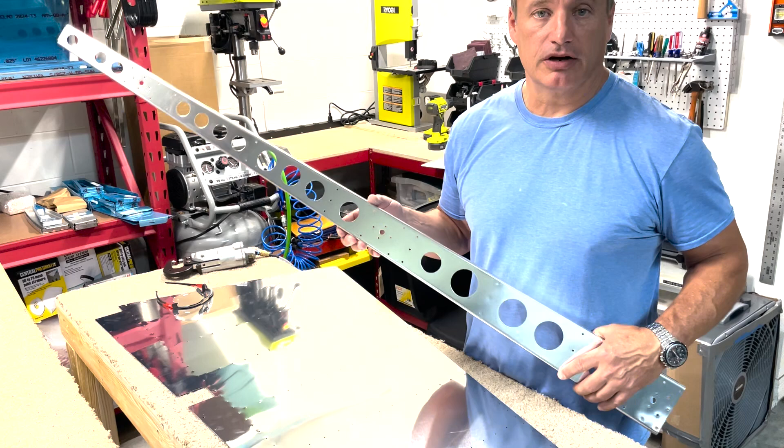So I grabbed a drill bit on the back end just to test the size. Turns out it's all been final drilled. I knew a lot of the RV10 and RV14 kits were now coming with holes final sized, which was what surprised me a little when I did the vertical stabilizer and those weren't. But I just got off the phone with them and confirmed it. He said yeah, most of the kit should be final sized.

So in the instructions it still says to go ahead and final drill the holes after you've Clecoed them together, then take them apart, deburr, and all that. But the good news is, at least so far for the rudder, and I'll verify other parts as I progress, it looks like this section doesn't have a lot of holes that need to be drilled out. I checked everything with a drill bit, then went ahead and put an actual rivet in the hole just to triple check that all the holes are final size, and it seems like most of them are. So that's good news, it'll save me a little time.

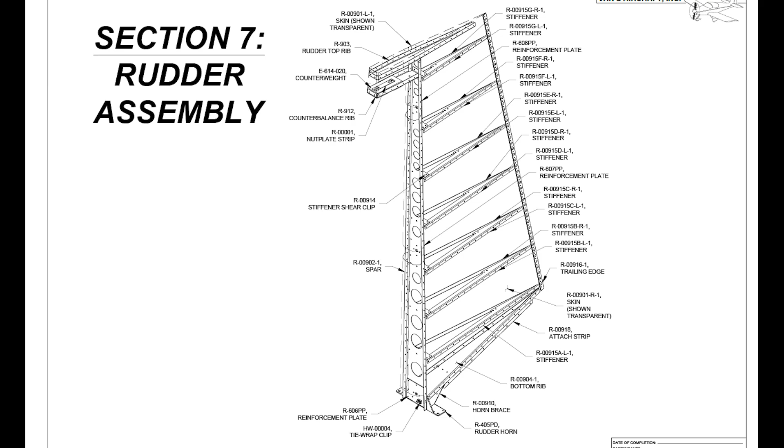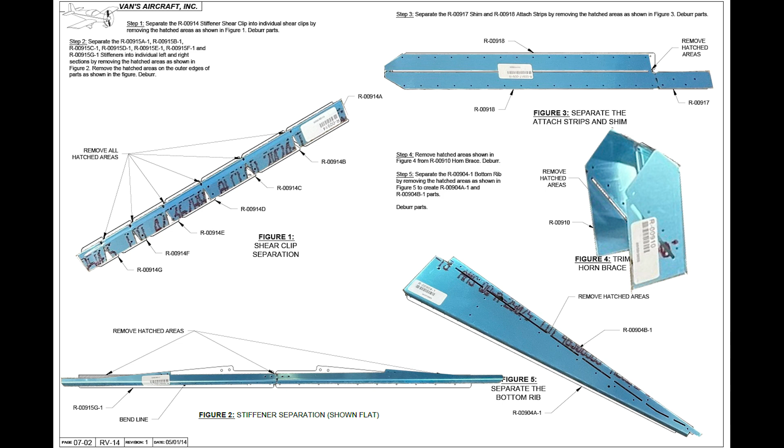So in order to make a completed rudder emerge from this set of plans, the first step, as is often the case, involves cutting or separating large pieces of aluminum into smaller pieces. Most of the aluminum parts for the kit are stamped out by a press at Vans, and when making a lot of small pieces, it's often more efficient to stamp them out as a single piece which needs to be trimmed or separated by the builder. So I begin by separating the single piece into what will become 7 shear clips, which will be used to join the left and right stiffeners to create internal ribs for the rudder.

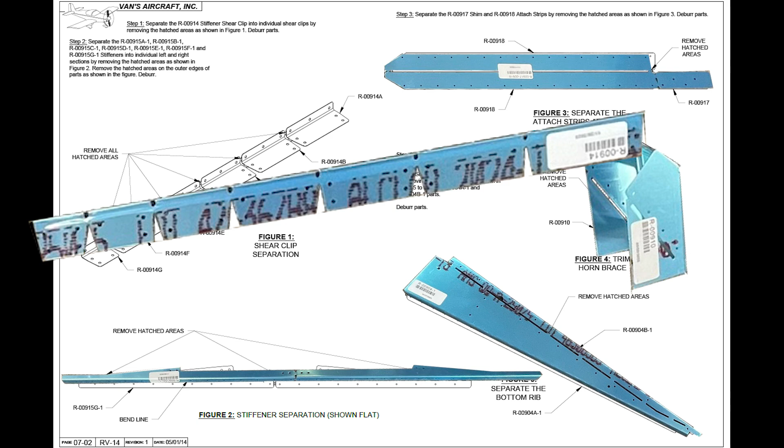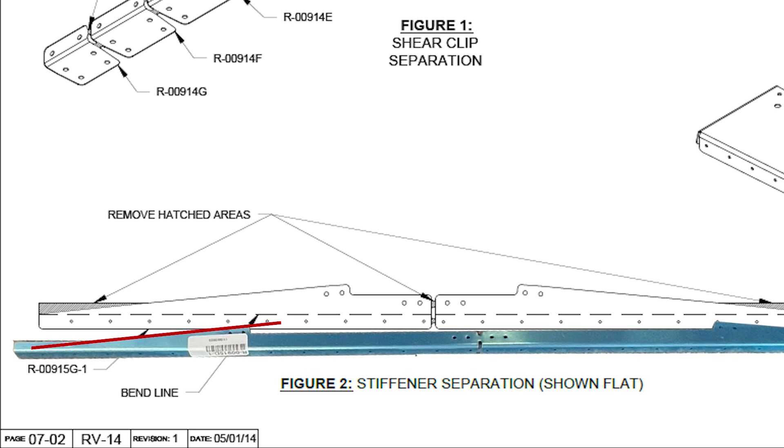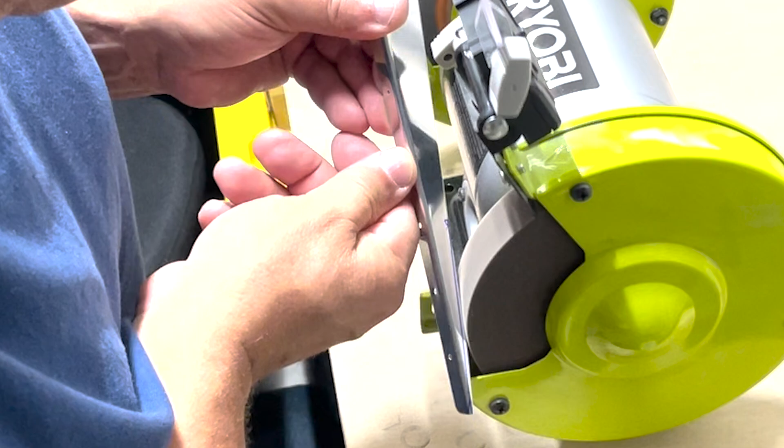Similarly, the stiffeners have to be separated and then trimmed and shaped. As you can see here, part of each stiffener was stamped out with part of the correct angle, but the ends need to be cut to extend the angle all the way to the end. With all these pieces, I start by making a rough cut with a bandsaw just a little away from the line, then use a Scotch-Brite wheel to carefully grind the excess away and bring it right up to the line. Then, of course, I spend a great deal of time deburring all the edges of each piece. The end result looks something like this.

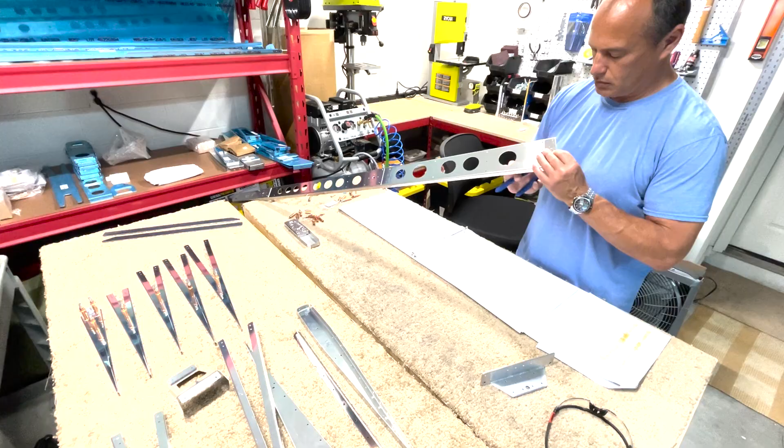The next step involves a lot of prep work, and then Clecoing together all the primary components that attach the rudder to the spar. This includes the large half of the bottom rib, the reinforcement plates, and the rudder horn. They'll all get match drilled where needed, and the top ribs have their corners shaped for the initial test fit assembly with the skins.

As you can see here, the top of the rudder has some ribs which extend out above the vertical stabilizer. Just below this extension in the top rib is a counterbalance rib, which, as the name suggests, holds a lead weight to help stabilize the rudder and prevent any fluttering during flight. The weight itself gets drilled out for screws, and the rib is countersunk and prepped for nut plates, which will hold the counterweight in place later on.

So as I mentioned, everything's been final drilled for the most part, but it's always good to double check, because I just found out this piece here—the holes in the spar are final drilled, but the holes in this rib right here are not. It was a little tough getting those in there. So most of the stuff seems like it is and should be final drilled, but occasionally you're still going to come across a part that's not.

The other thing you're going to have to do per the instructions—there's a couple spots where you're going to enlarge some holes but not others. So for example, in the rudder skins, all the holes are all final sized, but the instructions specifically call out for 2 holes near the top to actually get upsized. So you can't just completely ignore everywhere it says final drill—still have to double check as I go along. But a lot of the work has been done, which also means most of these holes, because they're final sized, don't need to be deburred either. I'll double check them all, but for the most part they all feel pretty smooth, so it saves a little bit of work.

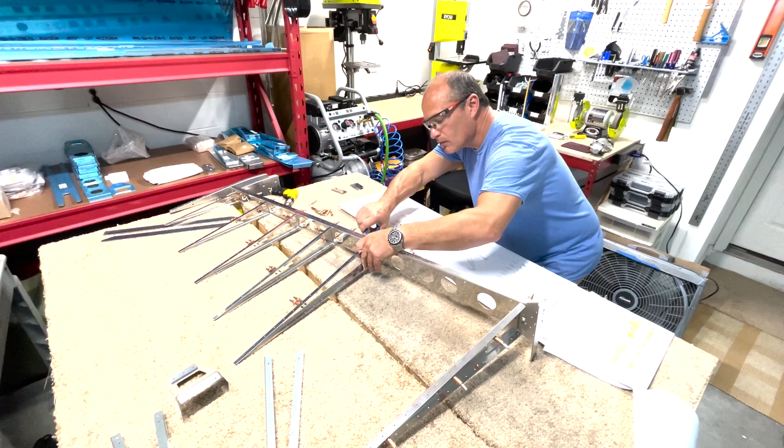The stiffeners are joined together as respective left and right halves, and then attached to the spar with the shear clips. This basically creates a 3-part rib-like assembly, which forms most of the structural skeleton inside the rudder.

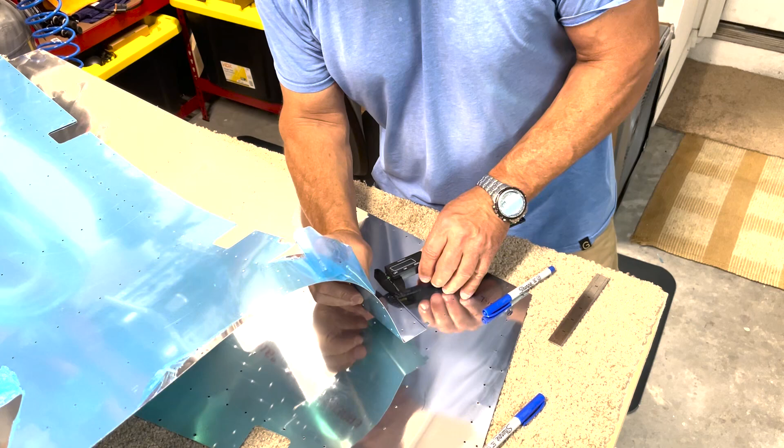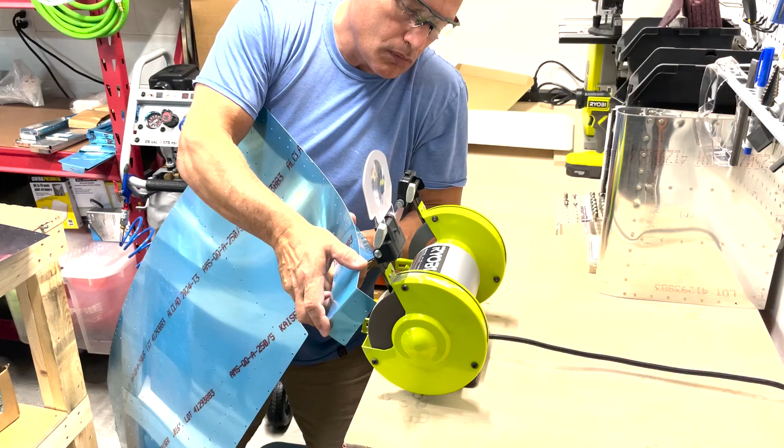Where the rudder skins overlap at the front of the top and the counterbalance ribs, the instructions call for a very small amount of skin to be trimmed away—only about 3/32 of an inch. I decided to use shears to make the cut on these edges, and I'm glad I did. It would have been very hard to maneuver the skins on the bandsaw, and the shears make a smoother cut. Unfortunately, as you can see here, I stood right in front of the camera as I made the cut. And again, I made the cut just a little bit outside of the line, and then used the 3M wheel to grind down the excess.

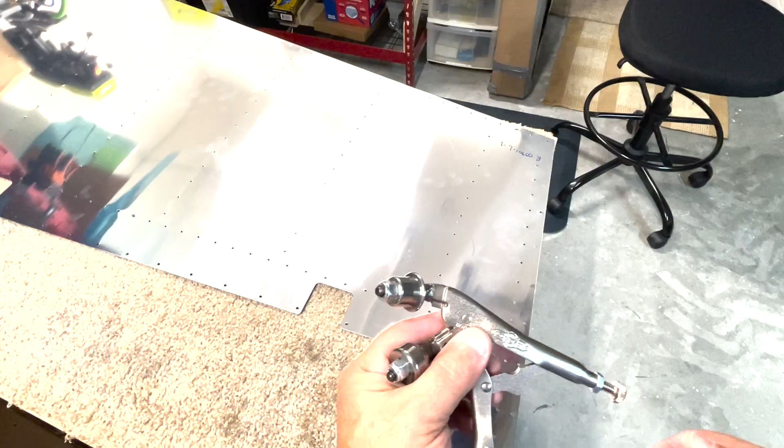Once that's complete and the edges are deburred, the edge of the top skin, where the 2 overlap, gets a slight bend rolled into it to keep the edge flush once it's all riveted together. So to set it up, basically you open this up so that when it closes, it's got a gap. Put it down here—let the edge of the metal not get up in this bend, but just in this flat part. Close it, and then holding it there, you just tighten the screw up till the two parts just touch together with a little bit of light pressure.

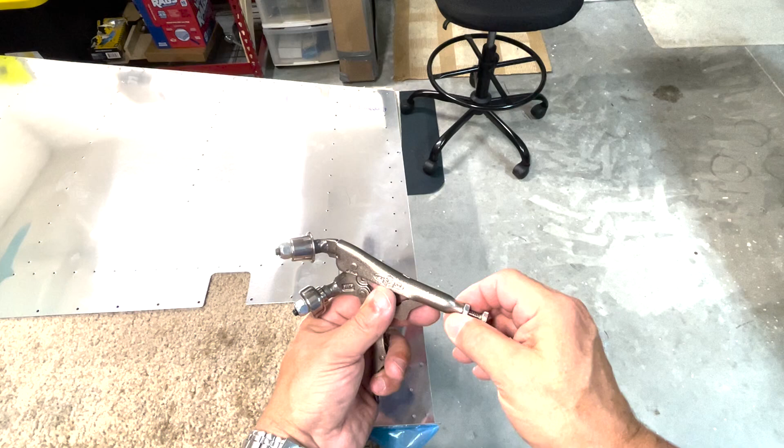Open it, turn this about maybe an eighth or a quarter of a turn, and lock it down, and that should give you that little bit of extra tension. Then when you put it in the metal, you're going to have the metal edge all the way up to this edge, which is going to allow you to get that little bit of a bend from this wheel as you pull it along one way, then put it on and push back to finish off the other edge. You don't want to start right at the corner—start near a corner, but leave a little bit of space. Pull it all the way one way, then push it off the other edge.

So in this next step, I'm mounting the trailing edge piece for the rudder to the back of the rudder skin. You line it up with the clecos, and then trim off the edge of it here to make it fit.

And then the next step is to go ahead and match drill all the holes for this. What they tell you is you want to be perpendicular to the chord line that runs through that angled piece. So with it sitting on the table, you'd actually have your drill on a bit of an angle, but I've got the whole thing sitting up on wood, creating the opposite angle here, so I'll be going almost perpendicular to the surface, which is basically what you want - perpendicular to the chord line that would bisect that.

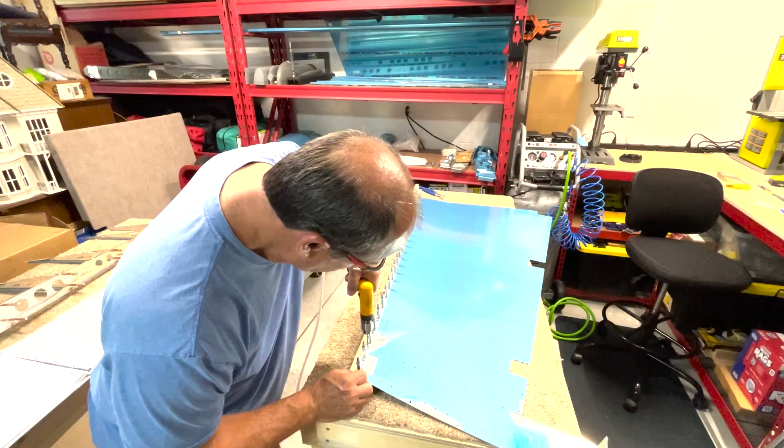The bottom assembly, made up of the bottom half ribs, attached ribs, and the rudder horn, is also assembled at this point, clecoed together, and then drilled as needed.

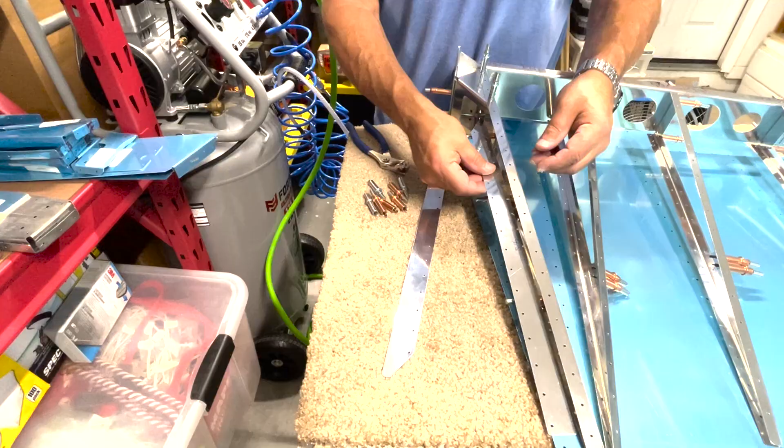Each half of the rudder skin now gets clecoed to the ribs and the spar and the trailing edge wedge for any required final drilling.

At this point, the whole thing gets pulled back apart, and all the edges and any holes that needed to be drilled will get deburred so that everything is ready to go to priming.

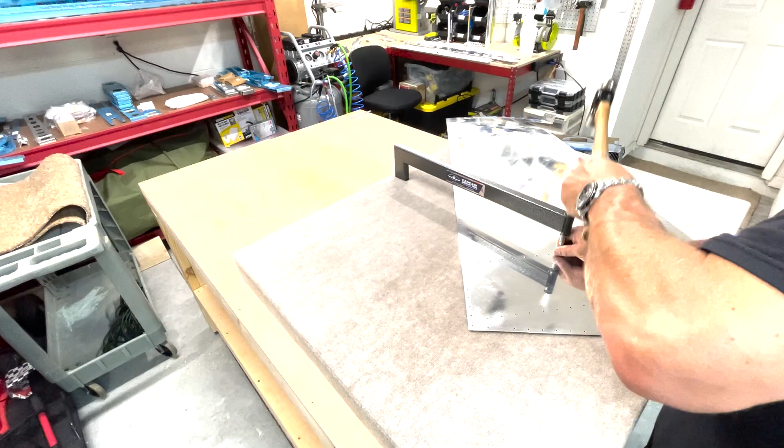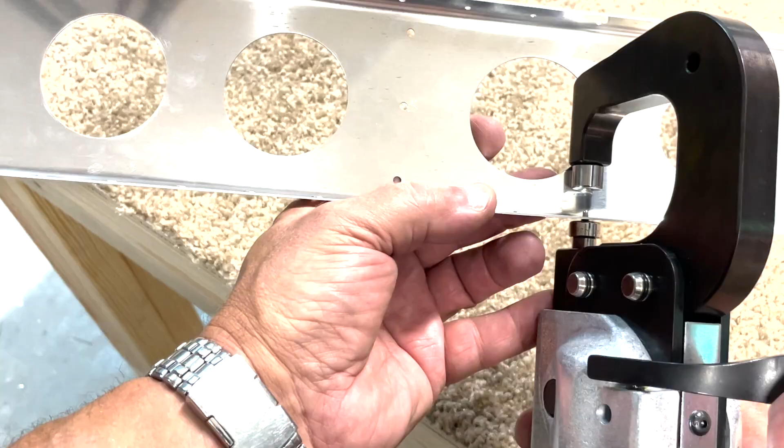And now the C-frame comes out to dimple the skins for the number 3 flush head rivets. Similarly, the spar, ribs, stiffeners, everything else gets dimpled as well. As is often the case, there are a number of holes which are not supposed to be dimpled or riveted, so those I'll cover up with some painter's tape to make sure I don't screw that up along the way.

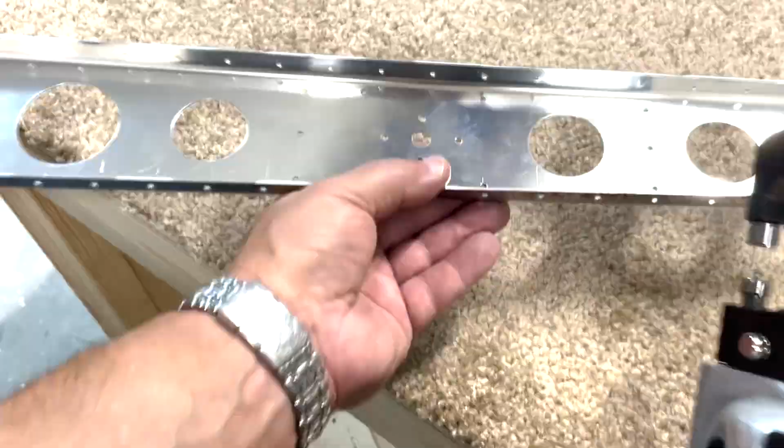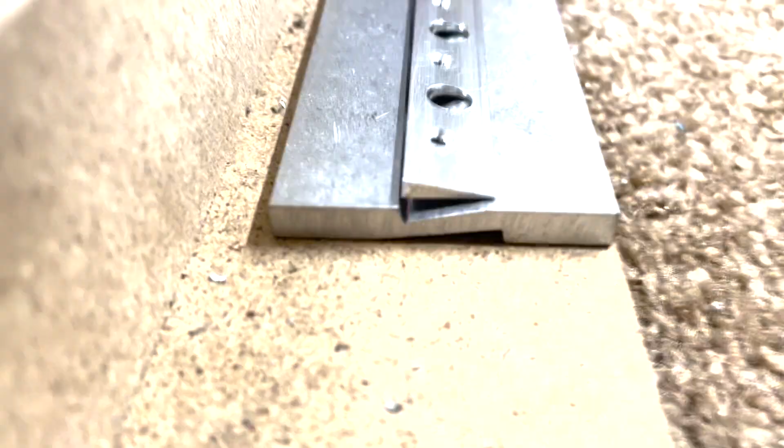This trailing edge wedge needs to be countersunk to accept the dimples in the trailing edge of the skins. To do this, Vans has instructions to create a jig to make sure the countersunk holes are perpendicular to the surface on each side of the wedge. But Cleaveland Aircraft Tool fortunately sells a pre-made jig for this specific task, so I just bought that and it works great.

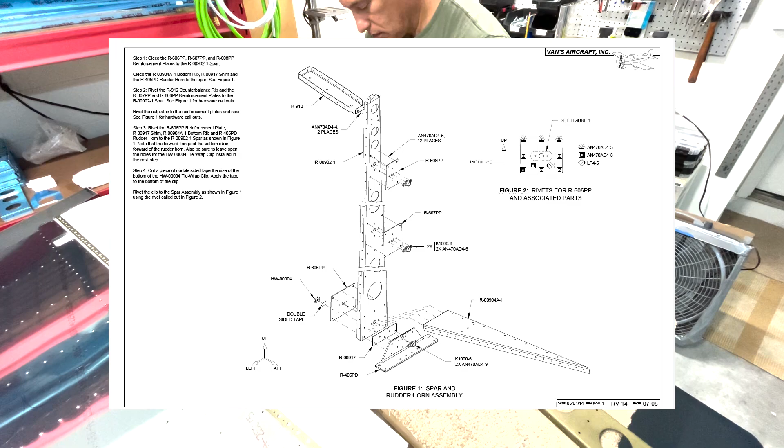Now that I've got all the priming complete, I'll go back to the instructions I marked earlier on page 5, and I'll complete the assembly riveting together all the spar substructure. This will also involve adding some nut plates to the spar, which later on are going to be used to attach brackets, which will actually connect the rudder to the vertical stabilizer.

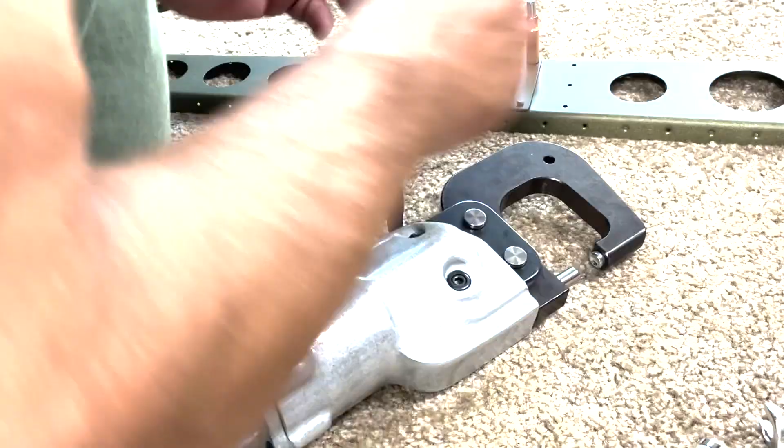So now that I've got the main spar riveted together for the rudder, the next step is to put the stiffeners on the rudder skins, which are what I've got set up behind me here. To do that, I'll be back riveting the stiffeners onto the sheets, which is something I don't think I've done on the project so far.

So it's a type of riveting that I enjoy doing for a couple different reasons. One, you get to use the rivet gun, which is always fun because power tool. Unlike normal riveting, where you've got the rivet gun in one hand and a bucking bar in the other, trying to stabilize material in between the two, and often not a lot of room to get your fingers up and manipulate the bucking bar on the back side, so it's a little bit tricky.

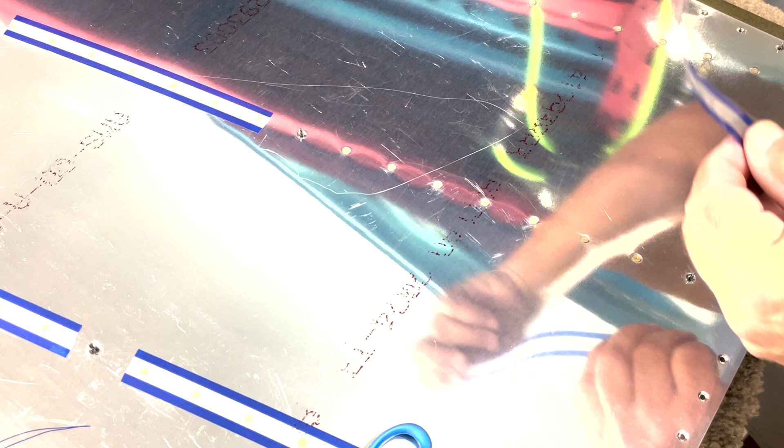With back riveting, we're actually going to put a metal plate underneath the back of the skin itself. We can line up a whole bunch of rivets in a row, and then we take the rivet gun with a back rivet set, and instead of using the rivet gun on the head of the rivet like you normally do with the bucking bar to mash down the shank of the rivet, the head of the rivet is sitting on the metal bar, and you just take this back rivet head and mash down the shank of the rivet, which is awesome because it goes a lot faster. It's a little bit harder to screw up, which is also good, but it's just a lot of fun. So let's do that.

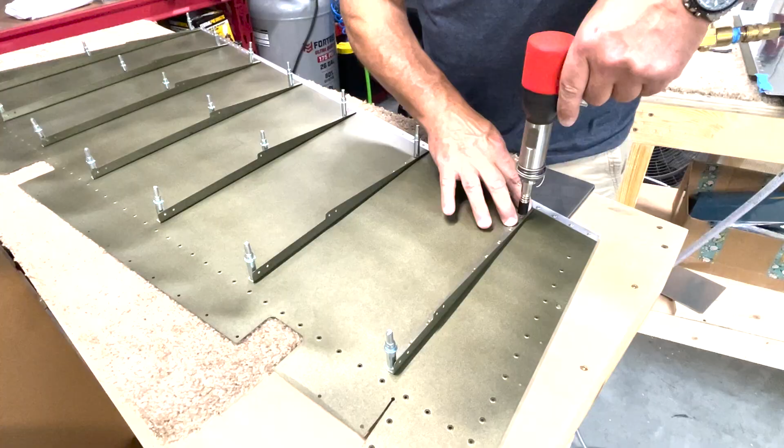Next up, the instructions call for the small half of the bottom rib to get riveted to the right rudder skin.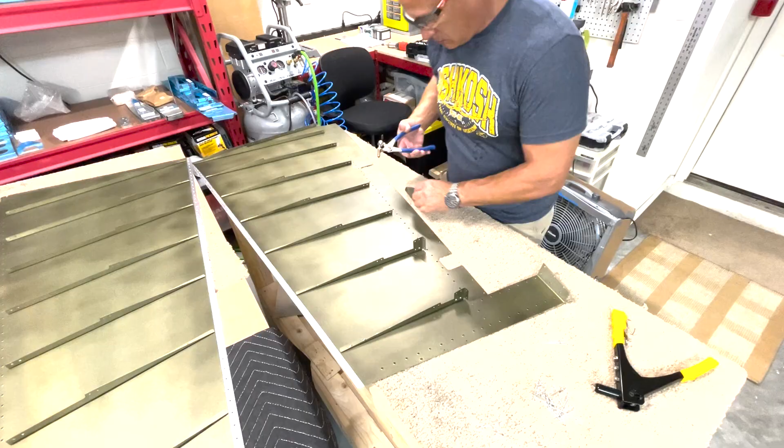And I'll also rivet the corresponding shear clips to their respective stiffeners on that same right rudder skin.

It's important for the stability of the airplane to have the trailing edge of the rudder as straight as possible. When the trailing edge wedge gets riveted together, there's a potential to create some waviness between the rivets. So to help prevent this, Vans instructs you to use some special 3M double-sided tape to adhere the wedge to the skin where it's going to be riveted.

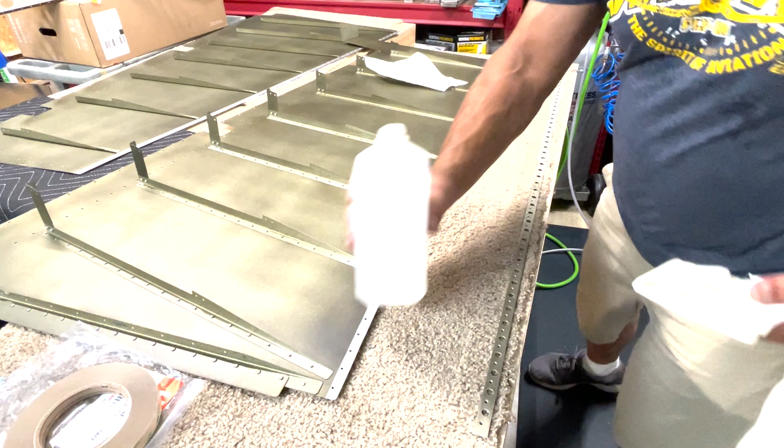They used to tell you to use fuel tank sealant for this step, but they're now recommending this specific 3M tape. I think it's because it was too easy to use too much of that tank sealant, which was also kind of a mess. This tape is very thin, not really like tape at all. Once the two protective sides are peeled off, it's basically just like painting on a thick, sticky adhesive. There's no solid backing like you get with normal Scotch tape or anything like that.

I found some of this on Amazon, but reading through comments from people who purchased it, it sounds like what I'd be receiving was some stuff that was a little bit past its expiration date. There was even a comment from one individual that said, RV builders, look elsewhere for this. So I did a quick Google search and ended up ordering some from Uline, and I was really happy with the result. Good stuff.

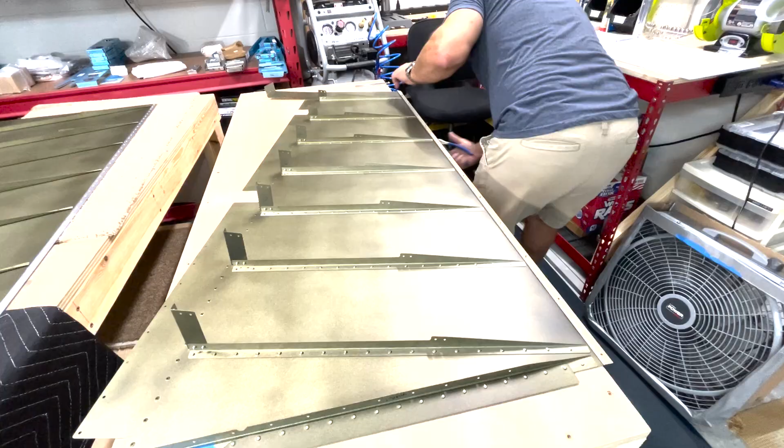So after prepping the surface of the skin and the wedge, the tape gets applied to the wedge with the protective coating still on the outside. Then the wedge gets clecoed to the right skin, with the clecos on the outside, obviously. I put a cleco in every hole so it's nice and firm all the way across.

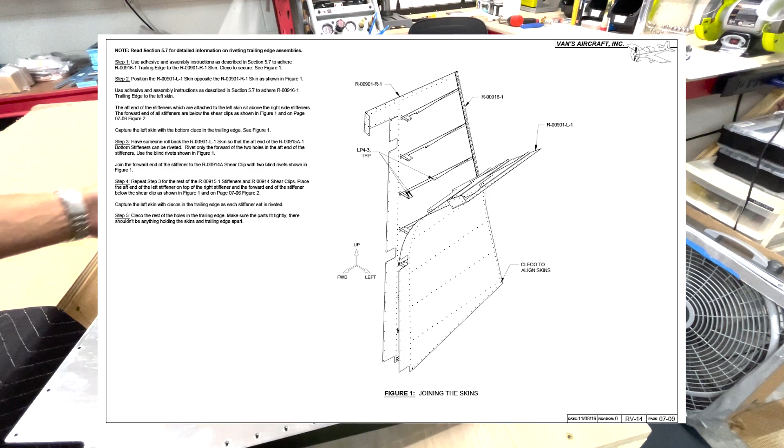Next up, the two halves of the rudder get riveted together. It's basically like trying to close up a giant zipper. So you use pull rivets during this process for the internal part where you're joining up the shear clips and the stiffeners, thankfully. There's really no other way to get in there and put rivets.

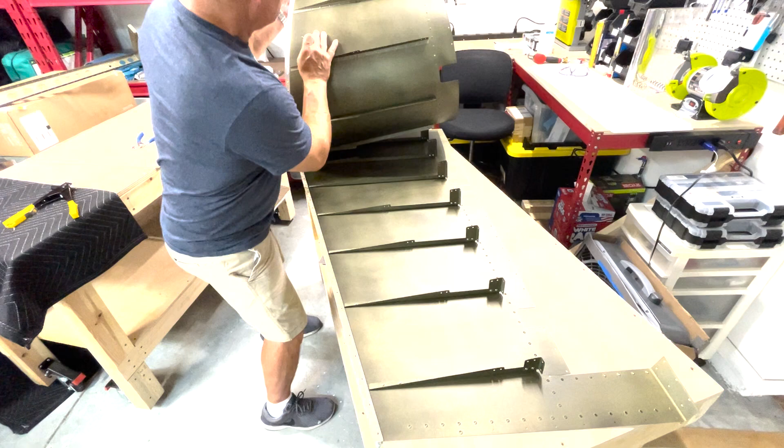The skin's really flexible, so it's not too terribly difficult to bend one side back and then eventually bring the sides together while putting the rivets in there, at least not once you've got the first one done. It's a pretty tight fit in there, and squeezing my hand in there, it kept pushing the two pieces apart when I was trying to get the clecos in there.

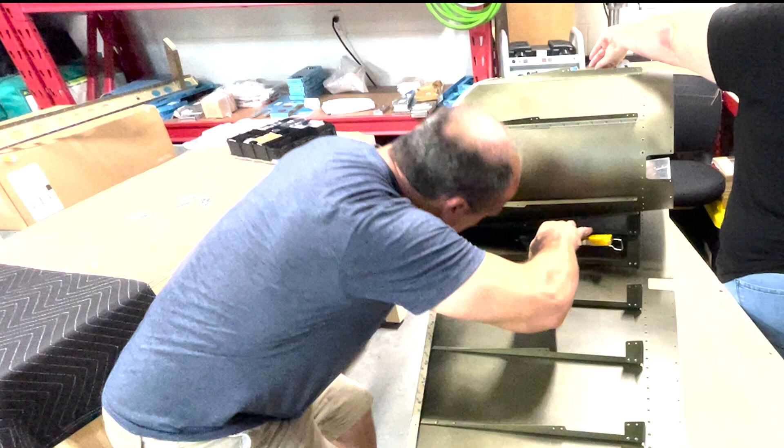The problem with riveting the first of these together is that with so much of the top skin rolled back, the weight of that wants to let the whole thing roll off the table. So I got a little help holding that in place just to get the first rib structure clecoed all together. After that, the rest go much easier.

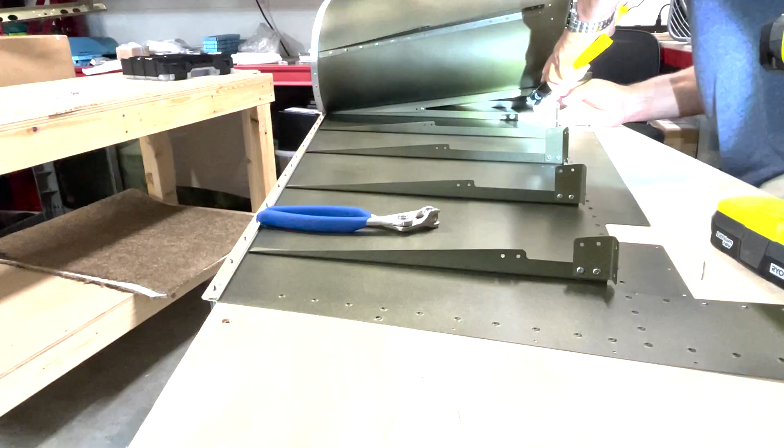Another issue is that when you get the rivet puller in there, you want to make sure the rivet is flush before you start squeezing. However, when you push down to make sure the rivet head's fitting nice and flush, everything wants to slide away from you. So eventually, I wised up and put something against the bottom edge of the entire rudder structure so it couldn't slide away from me, and that made things go a lot easier.

So starting at one end, I'll remove a handful of the clecos from the wedge on the right skin. Then I reach in and peel back the tape between the stiffener and the next one I'm about to rivet. If you hold that tape covering at about a 90-degree angle, maybe a little more, to the trailing edge, you can just pull it out and it'll uncover the adhesive residue without having to lift up the skin. It'll just kind of slide out.

Then I can go back in and put clecos into all the holes as I work my way up and zip this whole thing up. I decided to alternate the clecos between the left skin and the right skin, just trying to get even pressure on both halves of the trailing edge wedge. I don't know if it really matters, but I just did it that way.

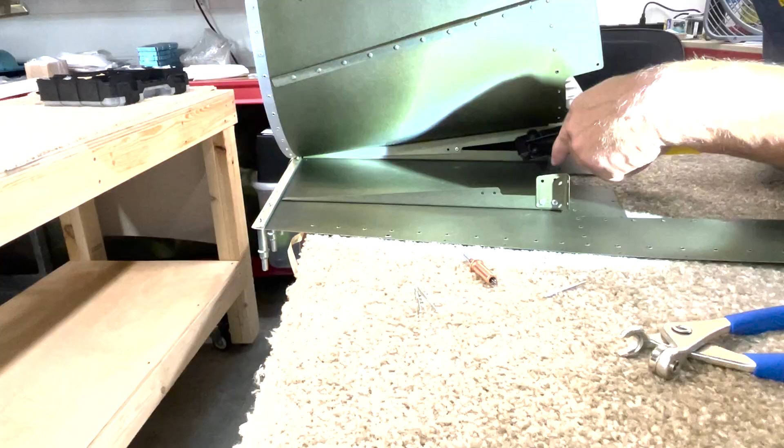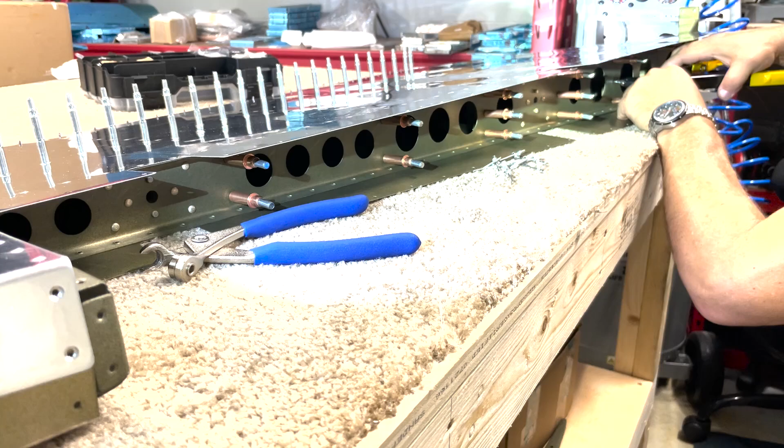So now with the trailing edge all sealed up and the internal structure all clecoed together, the spar assembly gets slid into place and the spar gets riveted to each of those shear clips on the inside. This is done using pull rivets. Again, there's just no other way to get in there and do that, so that's a pretty simple process.

Now down at the bottom, the other half of the bottom rib, the attached strips, and the rudder horn are the next things to get clecoed and riveted all together.

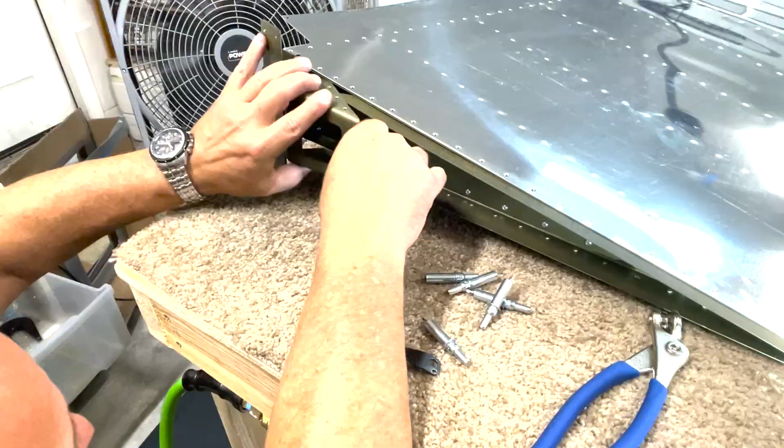So that was really tough getting this guy up in there. My advice would be don't put this last rivet in on this bottom edge. Leave that one out, and then once you get this in there, when you close up this edge, you could just close that rivet up. Because trying to slide this in there, it was kind of stuck on that rivet.

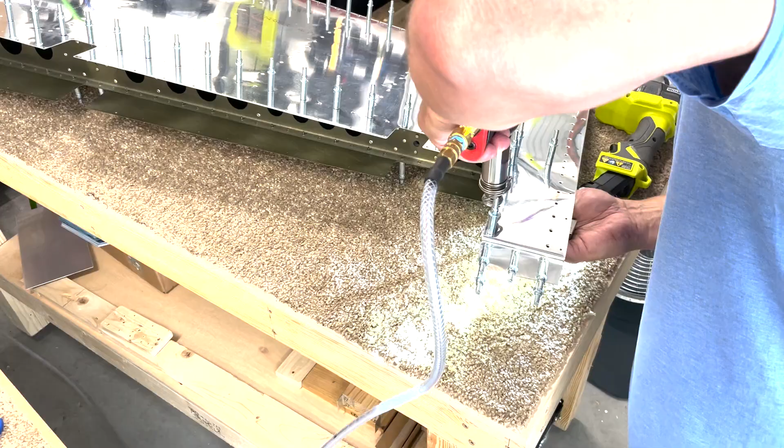What I ended up having to do once I got this in there was pull down on this and then just hit it with a rubber mallet, and it popped over that rivet. As you can see, it scratched up a little bit of the primer there, so I'll just touch that up. Other than that, it's all right. But yeah, it'd be a lot easier to get this guy in there if that rivet's not in the way. So there's a tip. With the bottom done, we'll move up to the top.

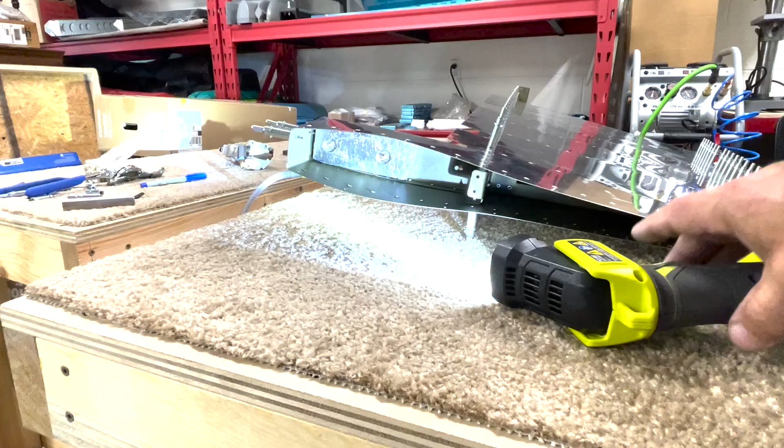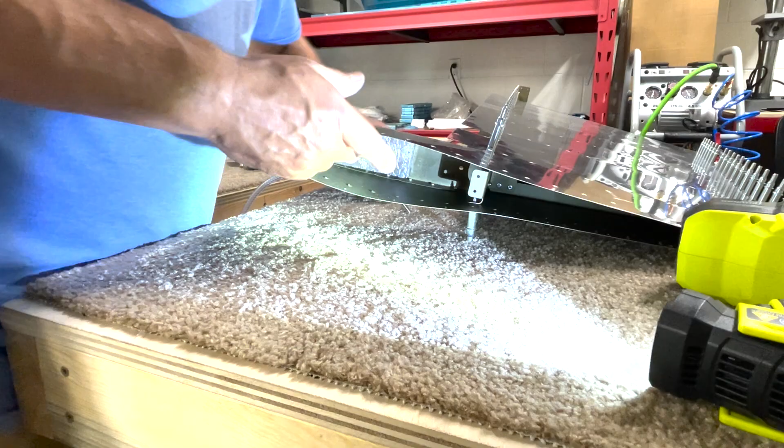The weight's then put inside the rib using the screws and nut plates, and then the top rib can be riveted into place.

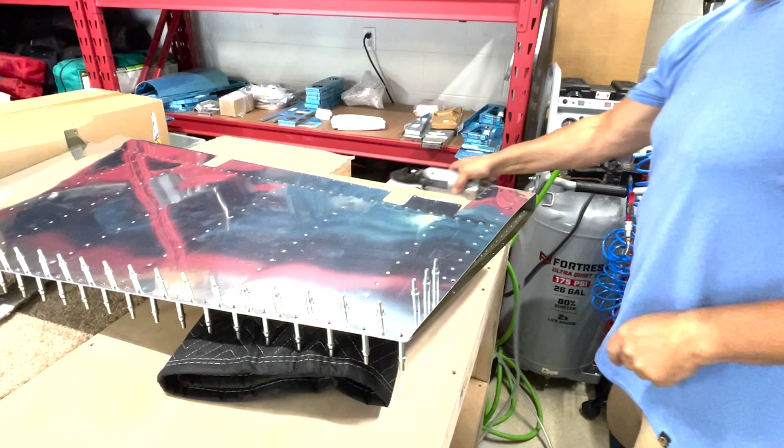Because of the very limited clearance, the last 3 rivets out toward the trailing edge of the top rib get done using pull rivets. They're special pull rivets that sit down nice and flush with the skin, so they're not as pretty as the normal flush rivets. They have a little hole in them, but they do lay flush to the skin, so not too bad.

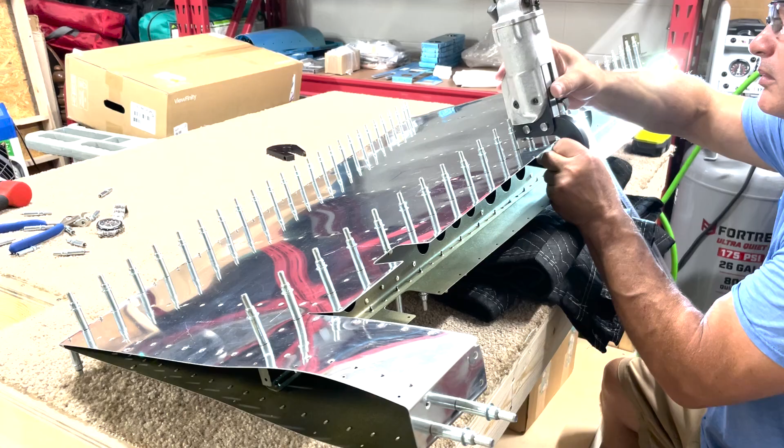And then finally, all the remaining rivets between the skin and the spar structure all get riveted in place.

So in the next step, we'll close up the trailing edge of the rudder using the process outlined in section 5 of the manual. To do this, we'll use a back rivet plate to set all the rivets in the trailing edge. This will be done in 2 passes as outlined in the manual.

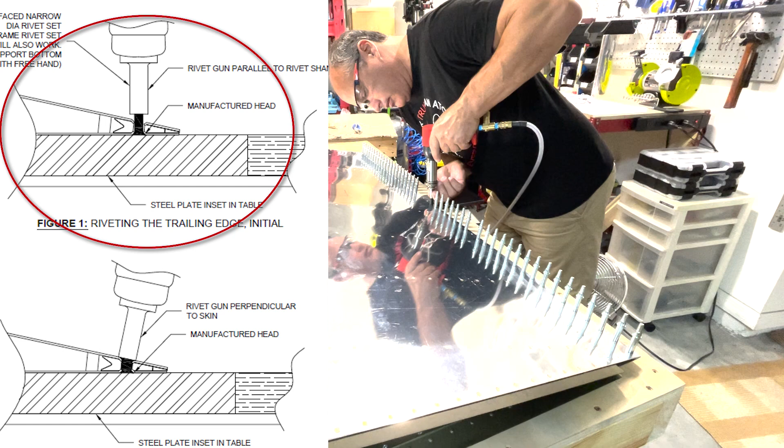On the initial pass, you're going to use the back riveting set parallel to the shank head of the rivet, and you're just barely squeezing the rivet down—basically just enough expansion to allow the rivet to replace the clecos and hold everything in place. But you're still going to have the majority of the rivet head sticking out.

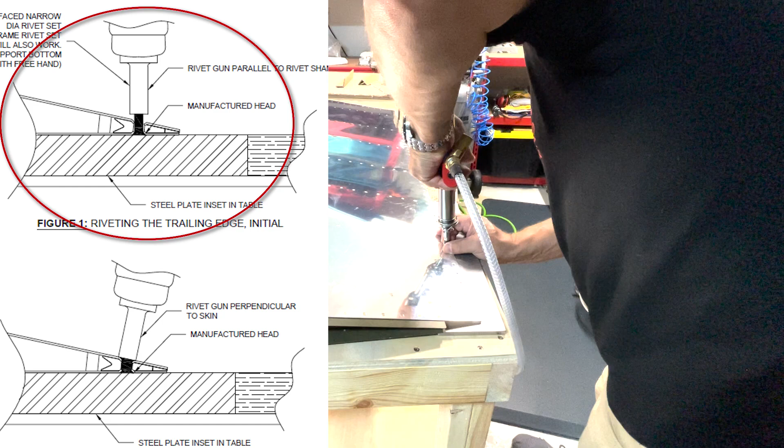Then on the second pass, you start with the back riveting set parallel to the shank head, but as you squeeze down the rivet, you slowly rotate so that you end up perpendicular to the rudder skin, and you'll end up with a nice flush finish on the rivet head itself.

Well, so all that's left now is to roll these edges and close it up. How hard can that be?

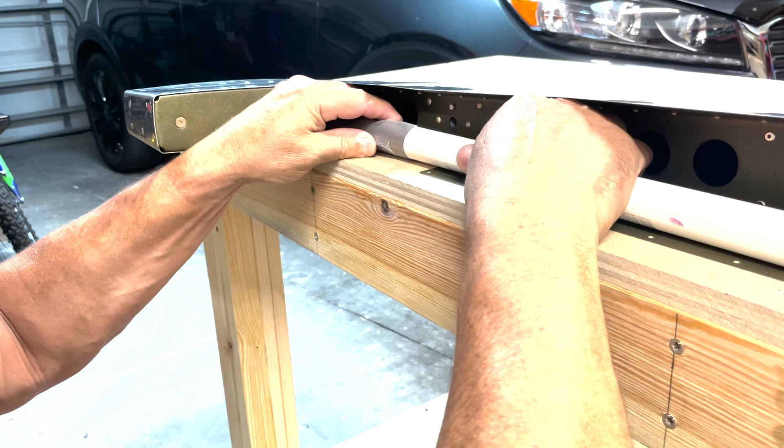The instructions in section 5 cover how to roll the edges, but basically you take some duct tape and, using a broom handle or PVC with about a 3/4 to 1 inch outside diameter, you tape that to the inside edge, and then you use a lot of downward pressure as you roll up the edge.

The idea here is where the skin meets the spar, you don't want to just pull the two leading edges toward each other, because then you'd get a bend right there against the spar. So the reason you're making this curve is so that as the skin comes out away from the spar toward the leading edge, it's nice and straight, and then there's a nice curve after that. So as you're bending the tube, you're holding down pressure against the table surface to keep the skin from bending too close to that spar.

Bending the first one is pretty easy, the smaller area. The second two are a little bit more challenging because the skins are a little bit bigger, and it's a little more challenging to get the curve right.

Also, bending the first side of the leading edge is pretty easy because there's lots of room to get your fingers in there. But once you've got half of it curved up, it's a little more difficult on the other half to get your fingers up in there and bend this up and then get your fingers back out, because the two halves kind of want to come meet up there.

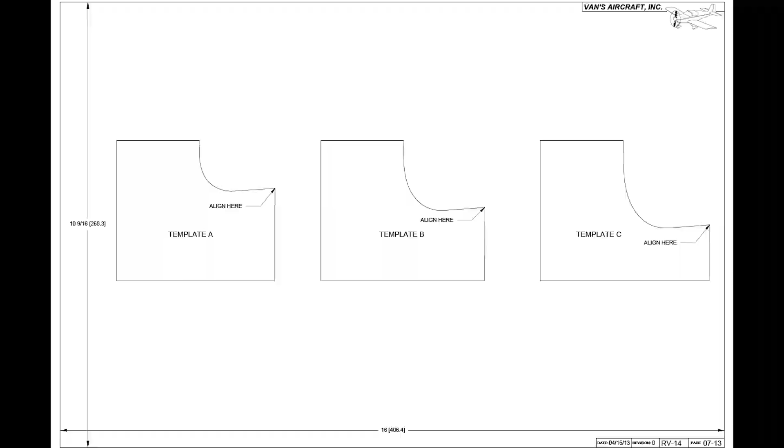The instructions provide some templates for each section of this leading edge, so I just made a copy of that and cut out the copies so that I could hold them up in place and make sure that I've got the bend just right.

And then finally, once the two halves are the right shape and got the holes lined up, blind rivets get put in and squeezed, and that closes up the leading edge. And just like that, you've got a rudder.